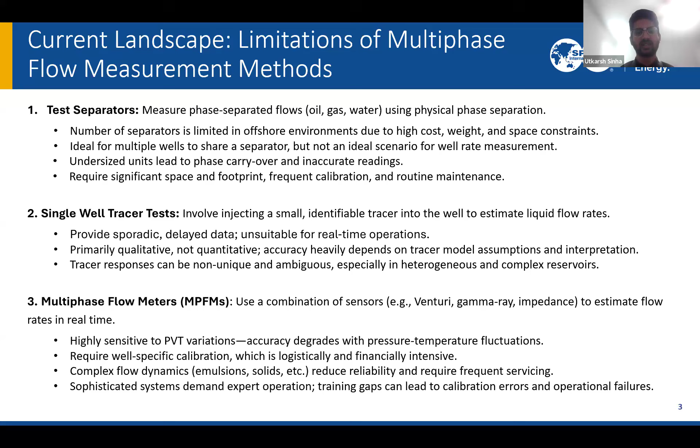And because of this, we have something known as virtual flow metering, which are benchmark models which have been used from time to time. So two kinds of virtual flow metering models have been used extensively. The first is first principle virtual flow metering, which is grounded in physics, essentially using mass and energy conservation, the reservoir inflow performance curve, and multiphase wellbore hydraulics, which is essentially your multiphase flow equation. Could be mechanistic, could be one of those semi-empirical correlations, like Beggs and Brill, Mukherjee and Brill, Hagedorn and Brown, Gray, etc. And could use choke models as well.

So what does it do? Basically, it can predict your three-phase rates using some of the common inputs available, like downhole pressure, which is essentially bottom hole pressure, temperature, wellhead pressure, surface temperature, choke opening, and downstream temperature, downstream to choke. What are the limitations of these methods? First thing is that it requires known phase ratios like GOR or CGR and water gas ratios to estimate individual flow rates accurately. Now, this is the whole challenge here, right?

We do not know water gas ratios beforehand, especially in this case, because of the presence of the aquifer. And if we assume that constant, then we assume that there is no aquifer influx. But we do have aquifer influx, at least in these cases, and it's a common thing in offshore wells, right? In gas wells. So the second method is data-driven virtual flow metering, which applies machine learning models trained on historical rates.

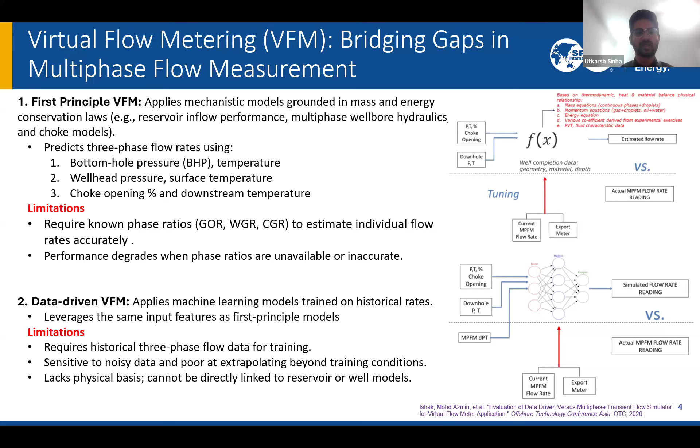So this brings us to the objective of this work and builds a nice case of why we are trying to do all this, right? We are trying to build a water gas ratio prediction method. And here, in most of the cases, like I said, you don't have any MPFM rates to calibrate, any historical rates to calibrate or train the model.

So the training is based on the physics definition of water gas ratios, which is that if you use water gas ratios in a multi-phase model of your choice, be it mechanistic like Ansari, or be it a very empirical and basic model like Hagedorn-Brown, you can plug this water gas ratio that you predict from your model and see how your BHPs compare to the bottom hole gauge BHPs that you have in bottom hole pressure sensors in the field.

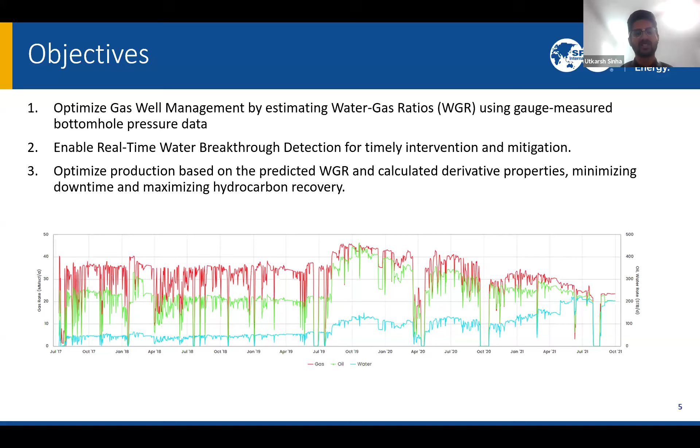And what it does is that it can tell you whether your water gas ratio is correct or not. But on the other hand, you can also tune your water gas ratios in real time from the real time pressure measurement. It gives you a real time water gas ratio, which can also give you real time water breakthrough detection, which is helpful for timely intervention and mitigation. And based on that, you can also optimize your production, calculate derivative properties, plan your downtimes, and maximize hydrocarbon recoveries.

It takes the gas rate, which is coming from the wet gas Venturi meter, and the PVT, which gives you information like CGR and viscosities and densities. Now, what we do is we predict the water gas ratios based on this. You predict your water gas ratios, see what kind of BHP match you get with that water gas ratio. If the match is poor, you retune your coefficients.

So the bottom hole pressure matching is the physics part of it, where you use a physics-based multi-phase flow equation to predict your bottom hole pressure based on your water gas ratios and other information indicated here. And how do we even predict the WGR that goes into the bottom hole pressure? That is through a data-driven model. So we have shown here how we predict our water gas ratio.

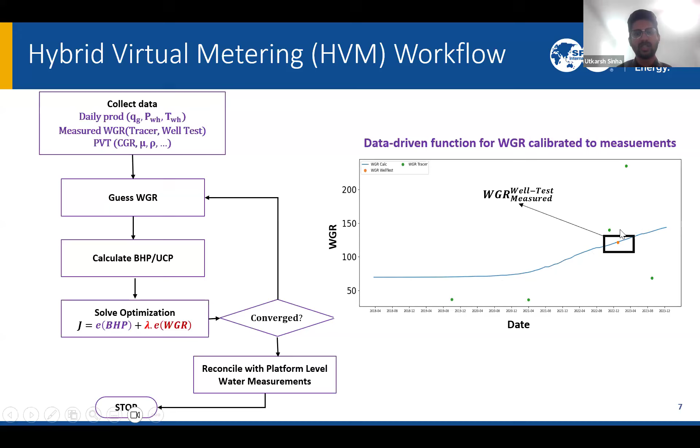So this is a good diagram to show how a data-driven model with BHP can reconcile with some of the tests. As you see, this is flat, and then somewhere around this time you see an aquifer influx, and then the water gas ratio increases. And this is a well test that was done with operational accuracy and reliability as told from the field. And we were able to nicely cut through it, which shows that the model was able to measure it. Now, this is just a cartoon diagram, just a representative diagram, but we'll see more pictures as we see the case studies now.

So let's also understand how this model is going to work in terms of orchestration. So data ingestion is going to be something simple. You'll require daily production data, wellbore data, PVT, well completions, and your gauge pressure measurement. Once you ingest the data, you'll do data cleansing, which is your prior data cleaning and pre-processing, where you remove the invalid data, remove the NaNs, do a downtime filter, apply downtime corrections, remove noisy BHP. You can set certain cutoffs outside which you may call it gauge drift and other kind of things.

Also, if there is any gauge drift or gauge malfunction that is reported from the field, you may want to remove that data. Once that is done, you need to do data aggregation, where you need to homogenize data to a consistent frequency, because the data could have big gaps, so you may do some interpolation in between. You may want to do some steady state detection to remove the periods where you see transients in the wellbore due to liquid loading and other reasons. Once you've gotten this nice steady state detection, then you calculate your BHP using the data-driven model in multiple iterations as shown in the workflow before.

Once that is done, you calculate your BHP accuracy and your errors, and you report your water gas ratios. The whole optimization and exploratory analysis is then followed by validation and testing, where you measure your residuals in terms of pressure and water gas ratios. You reconcile with the tracer measurement. After you've done the whole optimization, you can reconcile with your field level measurements.

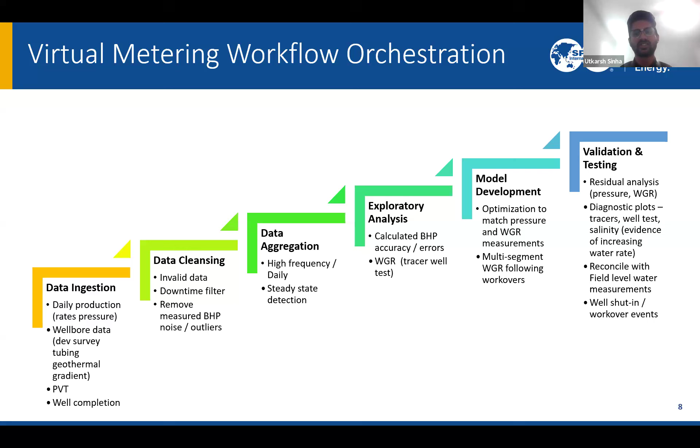And then you also try to find, if you see certain jumps or falls in the water gas rates, you can go at platform level and at well level and try to understand what must have happened there. So you can reconcile it also with the well shut-ins and workover events, which we'll also see in some of the case studies. So this is the first case study, the simplest.

So we are able to strike out the tracer data which is not so reliable, which is often the case, as I've explained, because firstly, tracer data is qualitative, model interpretation, and then lastly, sampling inconsistencies and operational failures. So those kind of things have been taken into account. Because it has both BHP match and tracer in the cost function, it is always able to eliminate the bad data.

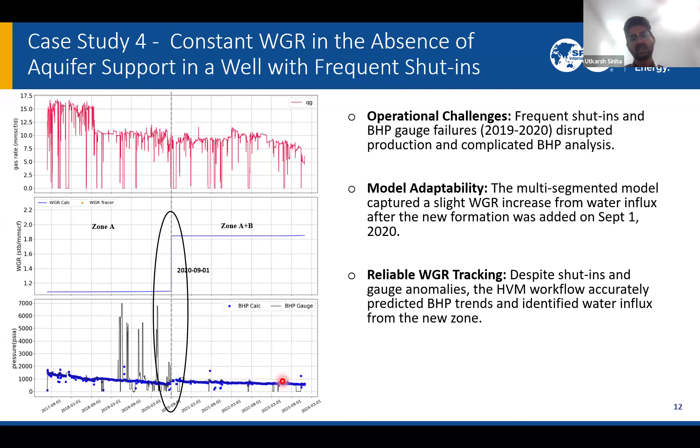your Buckley-Leverett curve. But on top of that, the multi-phase flow equations, because of the kind of equation which is accommodated in WGR, taking into account what the physics of this whole phenomena is, it is able to keep your water gas ratio constant instead of increasing or decreasing it, which can happen in a machine learning model because there's no physics constraint on it, and therefore you can very well continue on the initial trend because there was an aquifer influx.

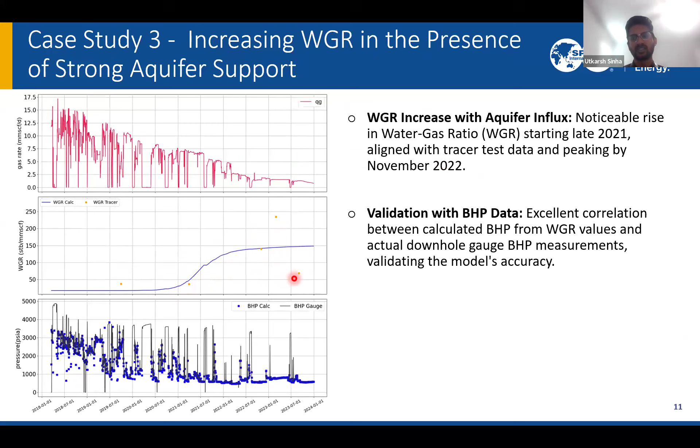then a flat line from here to here, and then a flat line from here to here. So basically between two consecutive tracer measurements, you take the last one as the constant value. So essentially what you do in back allocation, right? You keep updating after a certain period using your sparse measurement. Based on that, we calculated our BHP base, and based on our real-time water gas ratio prediction, we calculated our BHP calculated, and BHP gauge is what was known from the gauge.

If we compare our model and look at the results, we have 23.6 psi drift from the gauge pressure measurement in all the 40 wells, which is our P50 error, median error. And the P90 error is 136 psi. Now, please understand what is the range of pressure we are dealing with here, right?

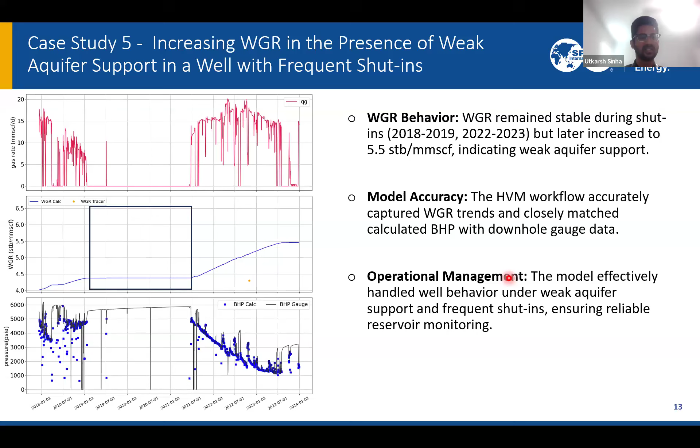If you look at any of the case studies, we are dealing with pressures as high as 2,000, 1,000, 5,000, 1,500, right? So if someone tells me that in a range of 1,500, 2,000, 3,000, you're off by 136 psi in BHP, which, by the way, even with a gauge, you get certain calibration errors and whatnot, I would take that. And that is a P90 error, by the way. So the worst case scenario, right?

So this history match confirms that our model, because it was using a multiphase flow model, was able to keep the physics of everything. From the tracer results on a well level, we've shown that it is also able to honor the tracer trends. But what if someone asks me, okay, tracer tests are not reliable, tracer tests are sporadic, and tracer tests are only available on limited wells?

Do you have any sort of method to confirm that your measured WGR, forget about the BHP history match, right? That could be model tuning or whatever. Does your WGR make sense? Is there any kind of benchmarking or measurement that can add more confidence to the water gas ratios and the water rates that we calculated?

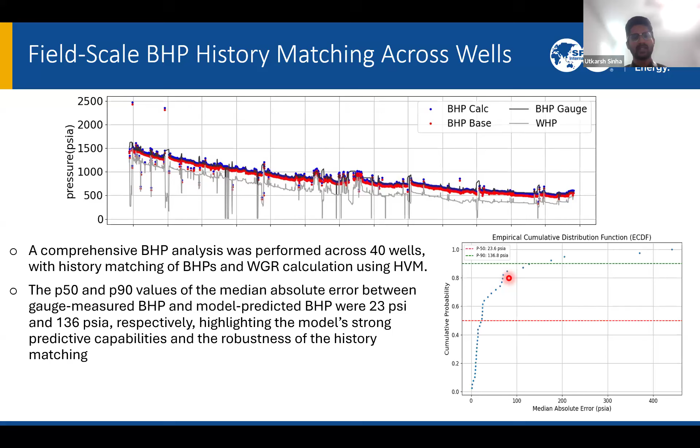My answer would be yes. And that confirmation comes from my field scale water rate match. Now, this is my calculated water gas ratios, calculated water rate, which is shown in the black. The orange is the water rates that are measured at the platform level. So basically, it's a plot between water rates measured at the platform level, at the facility level, and the black one is what you calculate from our real-time method.

Now, there's also a blue point which is indicating the calculated water rates with certain wells which were missing gauges. So we added some sort of delta buffer for that. But as you can see, they're not far from each other. That buffer is just to accommodate a couple of wells which were not producing a lot of water and which were missing gauges. But what we see from this is the platform level match and the actual match are very accurate in terms of water rates. But we don't stop there.

We also do something else. We go on some well level major events that happened after 2021 until mid 2023 in the well history, and we compare our results with the platform level results and try to reconcile what must have happened. For example, we see a 25 STB per day fall on a median basis in the rates based on our water gas ratios in late 2021, early 2022 in well A because of shut-ins. And that fall is shown clearly by the curve of the platform level if you zoom into this curve.

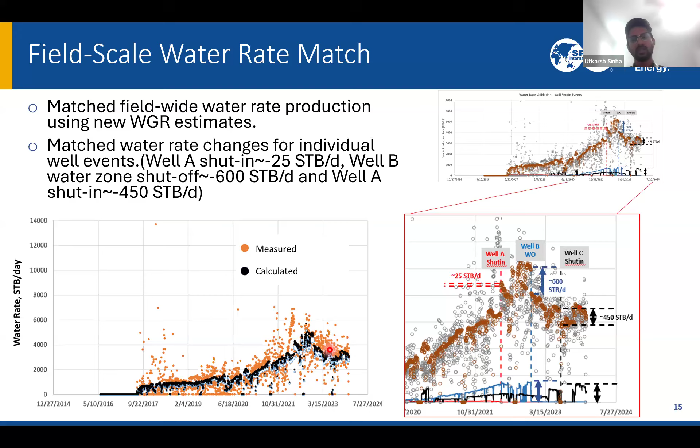These are major events that we can actually go and check from the operational field level history. And that confirms that this method could be trusted, since the trends make sense with what we observe operationally, and also with what we see at the platform level. So these are further reconciliations of the numbers that we produce, because numbers can be totally model based, tuning based, and not make sense. But because of so much physics and so much further investigation of the results, we were able to show a lot of confidence in these results.

So what did we learn from this whole hybrid virtual metering method that we developed? We were able to accurately estimate our rate. The model estimates the rate accurately. The model manages the multiple zones and commingling and the shifting of zones through a multi-segmented approach. It was also able to address data quality in terms of gauge drifts, gauge malfunctioning, operational disturbances, and frequent shut-ins and whatnot.

The BHP history matching, even in the scenarios that involved aquifer support, multi-zone production, frequent shut-ins, gauge drift, was the key. The detection of the steady state and the history match in that steady state.

And the anomaly detection, which was shown and confirmed from the field level measurement, was able to prove further that you can actually reconcile at any stage whether your model is in line with your platform level measurement.

And also the detection of water breakthrough, which we've shown in one of the wells, that could be detected. And because of that timing of detection, you can manage your well intervention and shut-ins and everything else ahead of time. So this is my presentation.

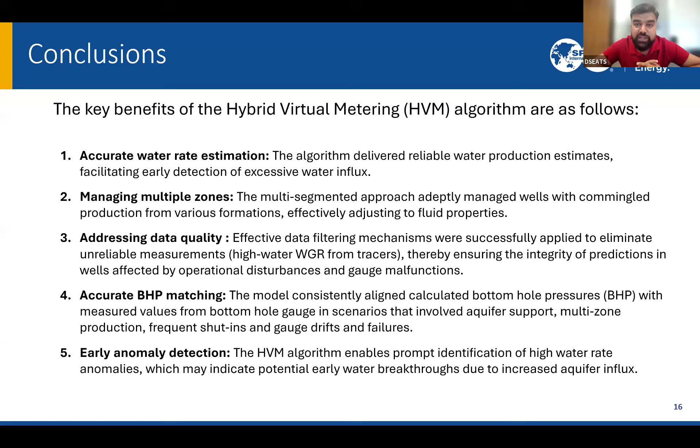So one of the questions from Keys is: water gas ratio associated with condensate water should increase threefold as reservoir pressure decreases threefold. I think it's pertaining to some of the graphs you were showing in the case studies. The water gas ratio should increase. I'm not sure if I've gotten the full question, but I will go back to the plot again.

So water gas ratio, if you have connate water saturation, will not be affected much, because if you go by the material balance laws or anything else, you're essentially producing from the same saturation, right? If you go by Buckley-Leverett two-phase displacement laws.

Yeah, your water gas rates can change a lot because your gas rates are varying, but your water gas ratios, if there's no aquifer present, if you're producing from your connate water saturation, should not vary much, and it should rather be flat. Okay.

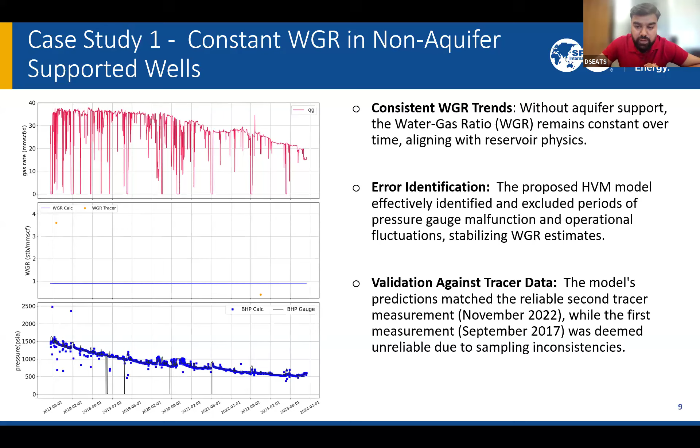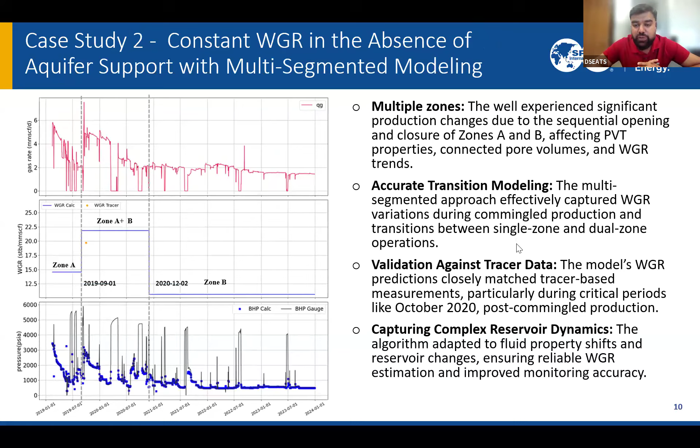Can you please say a little bit more about the steady state detection? Do you use derivative as a criteria, for example? So steady state detection is not essentially done on derivatives, but it is done more on basic rate steady state detection. So you take windows of rates and you see the rates which fall within 75 percentile of that particular window, you can take a weekly window, you can eliminate some of those, plus all the pressures which are pertaining to a very small rate.

Let's say, for example, you set a cutoff of 100 MSCF per day. It's a low rate for an offshore field. So all the pressures that pertain to such a low rate, you eliminate them from the history matching function. And then if you have shut-ins, remove all the pressures of the shut-ins and you only keep the flowing periods. So it's a data-driven approach where you basically eliminate the anomalies.

You can use a median filter or some other filter, signal processing techniques. On top of that, you also eliminate unphysical pressures if they exceed certain values which you don't expect them to. And also remove rates which are too low, because on those rates, your flowing multiphase correlation may not be so applicable.

And if you have certain periods where you've got operational information from the field that you observe liquid loading or something which is causing a transient phenomena in the wellbore, it's good to remove that, because we are using steady state multiphase models, and therefore they will not be applicable in the cases where you have liquid loading or liquid fallback. Yeah, thank you, Utkarsh.

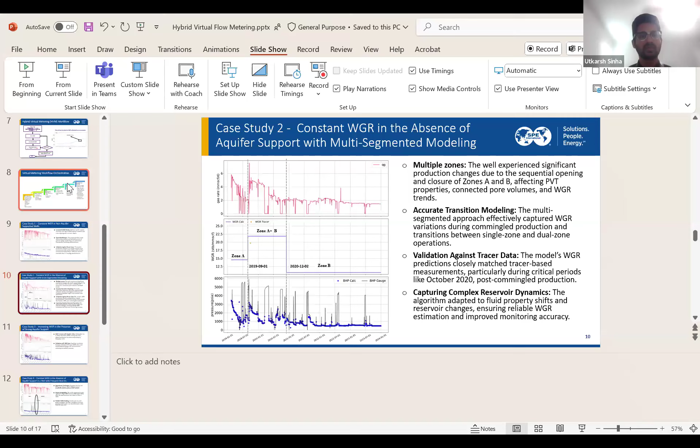If I were to repeat my slides, I don't mind. That also makes sure that while you're doing this, you also don't diverge too much from your tracer measurement, which makes sure that your tracer measurements are honored as much as you can, right? This function, the penalty function, is predicted water gas ratios on the days of tracer measurement minus the tracer measurement. So even though you're doing a BHP history match, you make sure that you honor your tracer measurement, or not just tracer, but any kind of measurement that you have.

You can have MPFM measurement. We showed well test measurement also in this case, right? But this is a penalty function that optimizes your coefficient under BHP history matching, keeping this constraint true. Does that explain? And this is the 4-parameter logistic curve of water gas ratios versus GP that we used, with these being the main coefficients.

And I think the natural question that comes after that is that you mentioned you use logistic regression, but can you use more sophisticated machine learning models? Absolutely, absolutely. We can use anything, including all the fancy deep learning models, right? But one of the reasons we used logistic regression was because it's simpler to handle. You have only 4 coefficients as compared to a deep learning model, where you may have 50, 100.

And secondly, with logistic regression, our main motivation was that its shape is very similar to your Buckley-Leverett shape. And therefore, it is easy to handle: for example, your lower asymptote, your upper asymptote, your point of symmetry, your slope of the whole curve. But that being said, let's say for a moment we want to give this method more freedom and we want to forget Buckley-Leverett for a moment. We can use a deep learning method. We can use an RNN or anything else.

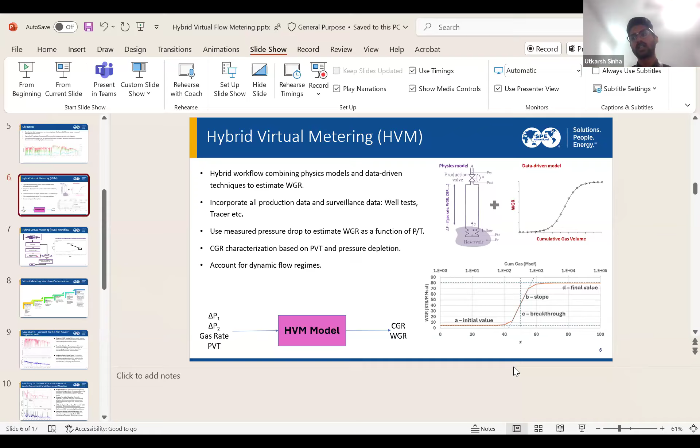So say you have 10 years of production history, which is very normal in offshore wells, right? You will have essentially 3,600 days of rates. Even if you eliminate all the bad data, I'm sure you'll be left with at least 2,000 to 2,500 days, right? I don't think it's too bad to use a simplistic machine learning method.

Yeah, you can't go too complicated because you'll not have millions of data here. We will never have that in oil and gas, right? But also understand that sometimes you can have high frequency measurements of the gas rates and the pressures, right? In that case, you can have hundreds of thousands of data as well if you have hourly measurements of gauge pressures and gauge rates, and venturimeter rates.

So I wouldn't say data is the main constraint. The main constraint is how you are able to control the shape. And if you're able to do so using a deep learning method, you might as well do that.

Okay. So Utkarsh, we are almost at the end of the time. Anything you want to say in conclusion? Any next steps or any new work that you're looking for?

I think this is itself a new step that you mentioned, that probably we might want to bring some level up model, data driven, maybe something like a simple support vector machine, or something which can also be deterministically controlled, or maybe a decision tree, but we need to have some sort of constraint. So the next step would be to bring some function which can offer more non-linearity, but we can have control on the shapes and have a more refined machine learning algorithm. That is one of the things.

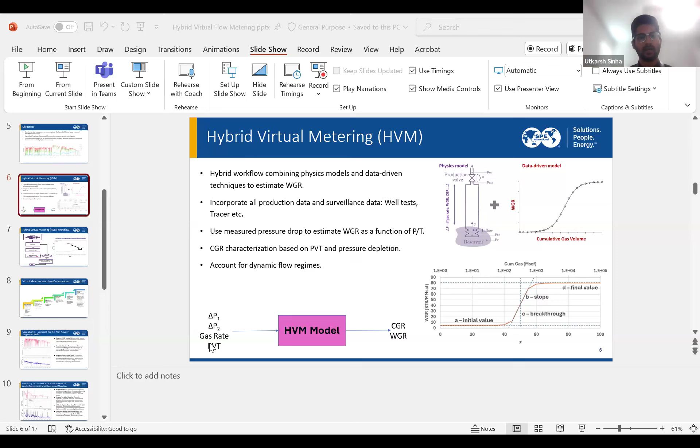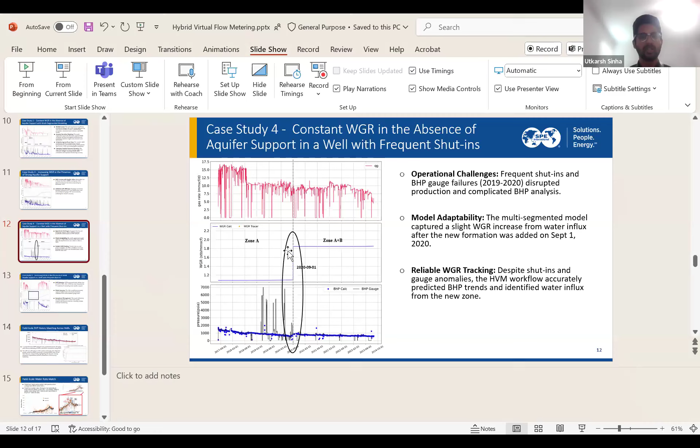Thank you, Utkarsh. One more question came in very quickly, if you can answer in a minute. How do you handle multi-zone completions with different water breakthrough behaviors? Yeah, so this is the case I think he's talking about, and I'll take the water breakthrough case itself. This one, right? Although it doesn't have a water breakthrough, it can handle water breakthrough from the same logic.

What we do is every time we have operational information that there is multi-zonal, that information has to be provided at an operational level, that you had a change at formation level. Now that change could be because you opened a new formation and produced commingled, or you shut off one formation and produce from another, vice versa. You need to update the new PVT based on the new formation that you open.

And what the model does is it stops right there where you made your formation level change, which I can show in this diagram nicely. It stops right there, and it restarts the whole model from the new segmentation, which is essentially that date where you made that zone level change. Then it stops again where you made another change and restarts the whole model from there.

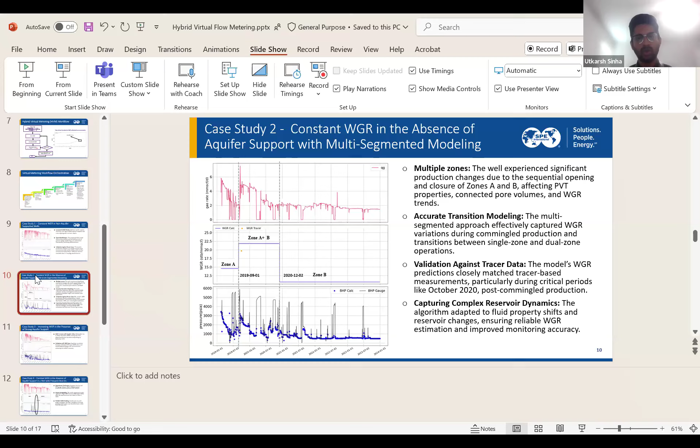So basically, how you do a segment level fitting, right? You do it in multiple iterations. You fit something through a first segment, then you stop, you reset it to 0, and then you start producing from here. If I were to explain from this picture, let's see which is the best WGR picture to explain. I think this is a good one.

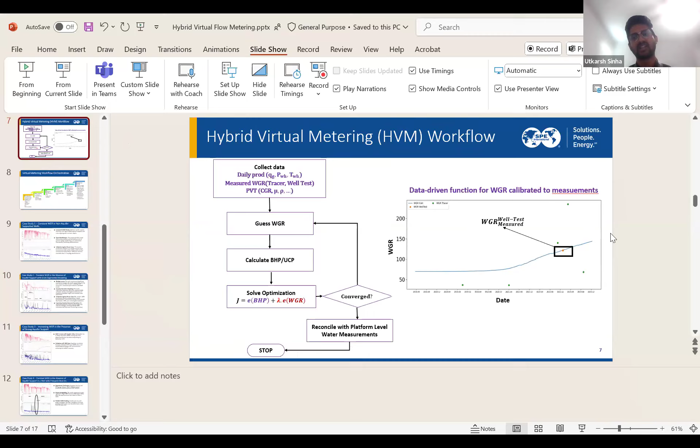So here you have water gas ratio, and here you will have date or your cumulative gas volume. You're producing this curve. Let's say on this date, you have a formation level change. Now you will reset your GP to 0 here, although your GP is not 0, but you reset it to 0, which is difference GP, and you restart the curve from there. Does that explain the question?